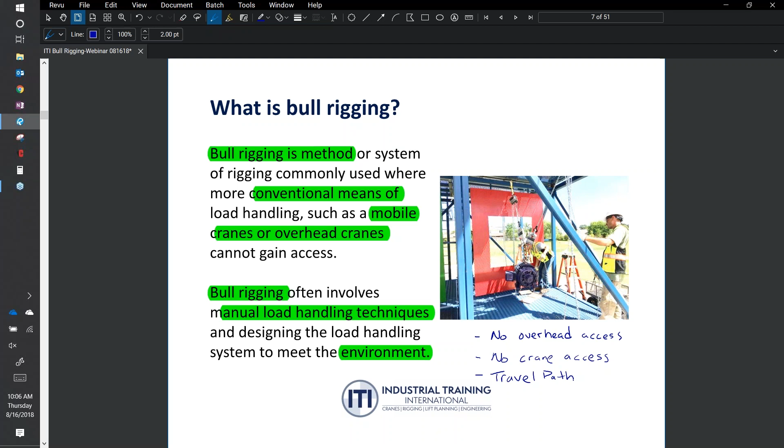Some common equipment we see in bull rigging: on the next slide we talk about the different types of slings we use. We've got a couple pictured that are most common, and we could probably add synthetic rope in some situations. The first one here, we've got wire rope, we've got alloy chain slings. All the regulations listed in ASME B30.9 still apply to this.

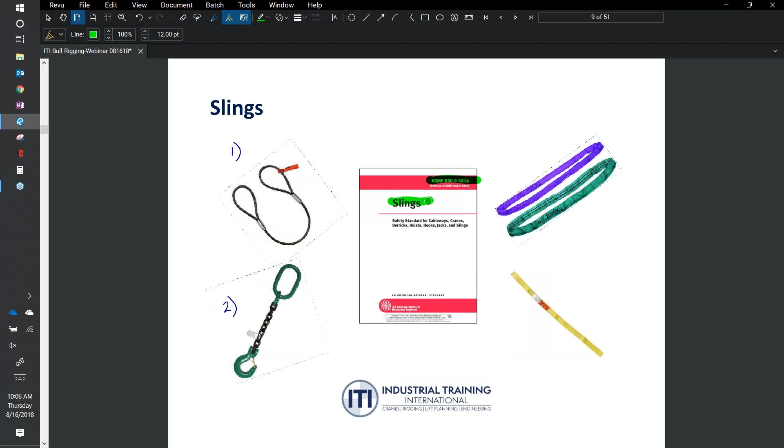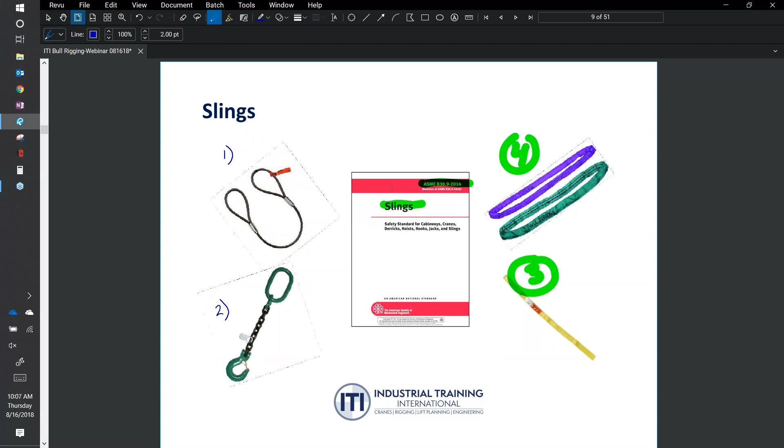So we still have to use them properly, according to the applicable federal regulations, whether general industry or construction, and also the applicable ASME standards. We've got wire rope, alloy chain, synthetic web up here, and synthetic web down below, my apologies, and then polyester round slings or synthetic round slings up above with number 4. So we've got our different types of slings, and like I said, we could probably add synthetic rope slings to those. Probably out of the 6 types of slings spoken to in ASME B30.9, metal mesh would probably be the least likely to be used in a bull rigging environment.

Next, we've got our hardware. So with the hardware available to us, we've got master links over here - I'll put a number 1 next to master links, oblong, pear-shaped, round. We've got shackles that we use, whether they be screw pin or bolt and nut style shackles. We've got our shouldered eye bolts. If you remember, for lifting, shouldered eye bolts are better than non-shouldered eye bolts because we can load them angularly.

But if we want to move away from eye bolts altogether, whether shouldered or non-shouldered, swivel hoist rings give us, if applied properly, torque to the appropriate value if required by the manufacturer, and then full contact of the bushing to the body of the load. We get a swivel hoist ring that gives you 100% of its capacity as long as you have free rotation of the bushing 360 degrees, and the bail 180 degrees.

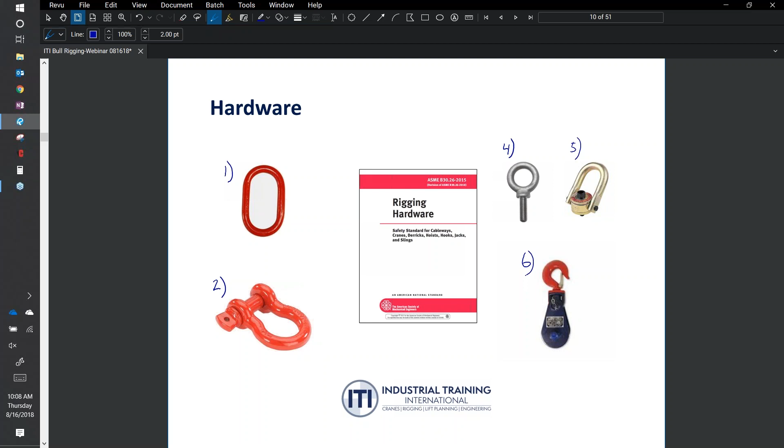And then finally, we have our rigging blocks down below. These can be used to increase line pull, multi-part line systems. They could be used to help redirect force if we're using winches and tuggers and things of that nature to help move the load. Next, we have probably what most people think of when we talk about bull rigging: come-alongs and chain hoists.

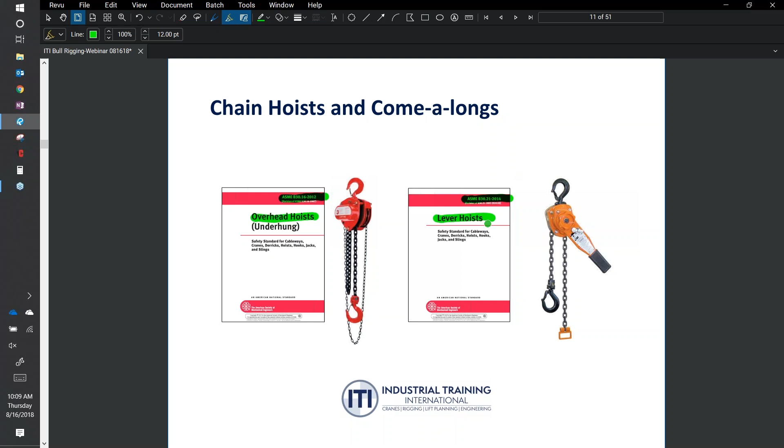Thing to keep in mind here is they both fall under 2 different ASME standards. ASME B30.16 is for underhung hoist, which would be manually powered, air powered, or electric. And then we have lever hoist under ASME B30.21, which would be what most of us think of as our come-alongs. You're not going to find any information in the federal regulations regarding chain hoist and come-alongs in either 1910-184 or 1926-251. The vast majority of our information on the use, inspection, and application of overhead hoists or lever hoist is going to be found in ASME or manufacturer literature provided by the manufacturer.

We also have winches, which is ASME B30.7, probably the closest thing we're going to get to using a powered lifting source is going to be a winch. This, in conjunction with rigging blocks, helps move the load for us.

We've got to pay attention - not all hoists are created equal. Some do not allow for vertical lifting or overhead lifting; they're specifically meant for horizontal load movements, while others are designed for overhead lifting. Just pay attention when you're making your purchase which one you're buying.

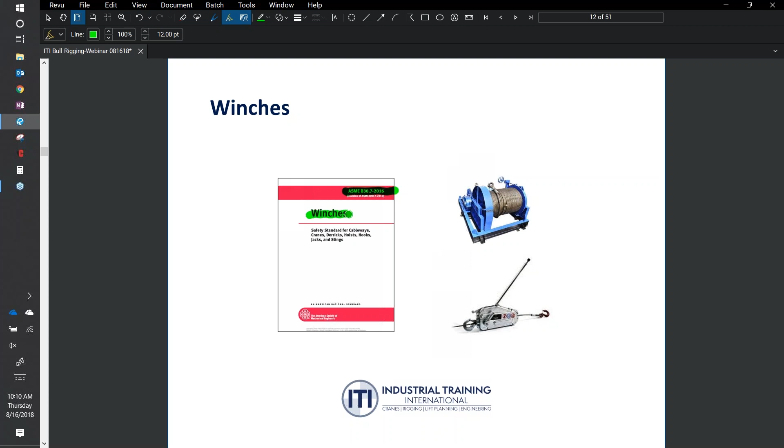And then at the bottom here, we also have what they call a grip hoist, also often referred to as Tirfor, one of the leading manufacturers. But that's another means and method of applying power to the system other than manual. With this one, you do have to operate the lever on the chain or on the grip hoist body to actually move the load.

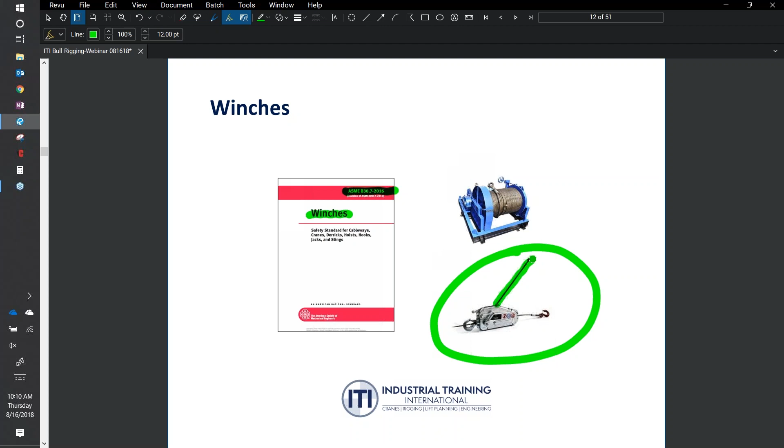Another method for bull rigging, and some people don't really think about it this way, but we're still in a manual load movement activity, are jacks and industrial skates.

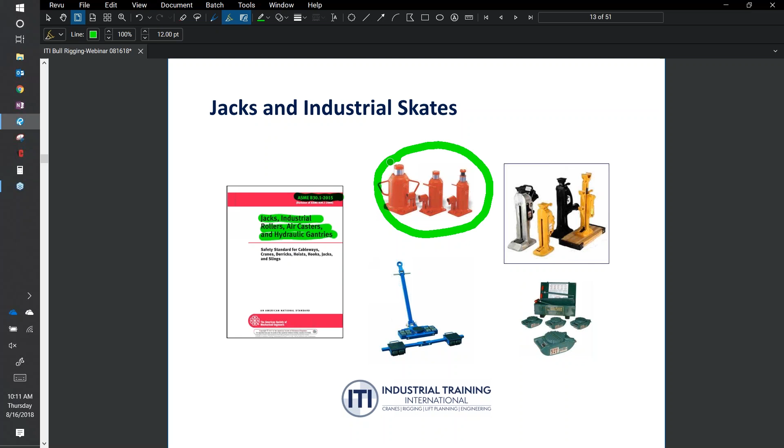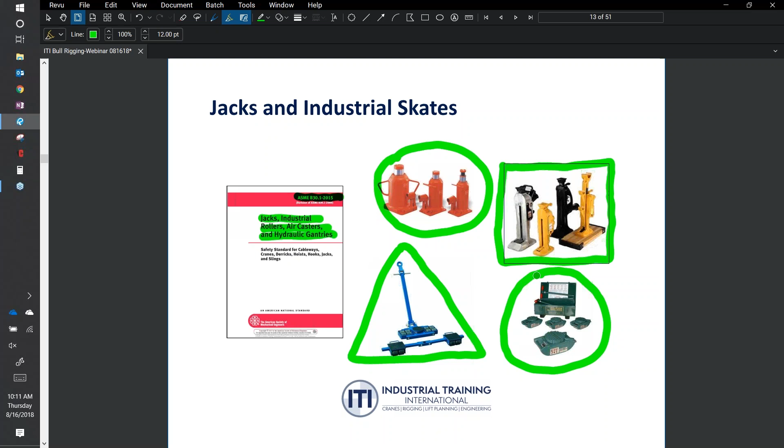We also have beam clamps on our next slide, different types of beam clamps. The important thing with beam clamps is they fall under ASME B30.20, which is below-the-hook lifting devices. Not all beam clamps are created equal. We'll find that out later in the program, where some of these are meant for just vertical lifting only. Others will give you a little bit of room, maybe 15 degrees from vertical in either direction, while others will give you 360 degrees. So you've got to pay attention to the limitations of the beam clamp you select and what your operation is going to be.

As we go through this, one of the key points we're going to hit on numerous times is the importance of planning the load handling activity. Even though it's manual bull rigging, planning is important: staging the equipment, having the right equipment, and knowing how to use it.

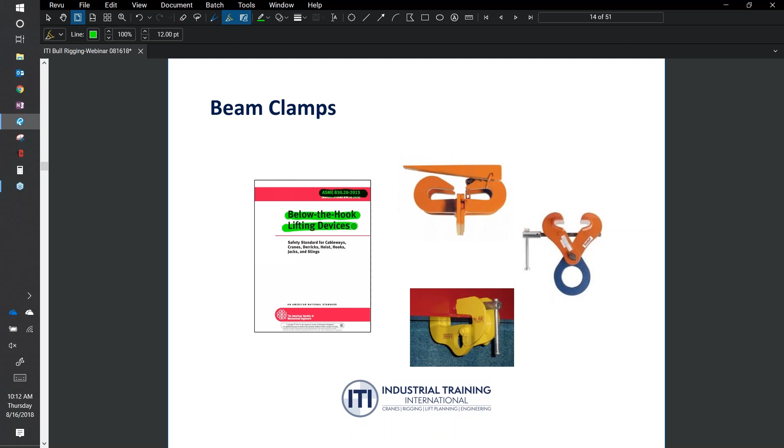So what are some bull rigging applications that we have? Well, the first one we're going to talk about is jacking and rolling: simply jacking a load onto industrial skates and moving it through a facility. Some things we're going to have to be concerned about. Let's talk about the resources available to us first.

So some resources we may have when doing jacking and rolling, of which we've already talked about: number one would be ASME B30.1, which covers jacks, industrial rollers, air casters, and hydraulic gantry systems. So if this is your method of bull rigging, great resource for you. Sometimes we get the load up on industrial rollers and move it using winches, so we'll have to rely on ASME B30.7 for the appropriate use of winches. We still have to connect the load to the winches, and things of that nature. Some other resources that may come into play are B30.9 for slings and B30.26 for our rigging hardware. So those are some of the resources.

Some of the equipment we might use for the jacking and rolling operation: one, we're going to have blocking and cribbing. We've got some great resources here at ITI - we actually have a horizontal rigging reference card that talks about the attributes of different types of blocking and cribbing, how to stack it. I have some slides built in here to show you panels of that card, and they even talk about the shear forces and what the different types of blocking and cribbing can support. So a great resource.

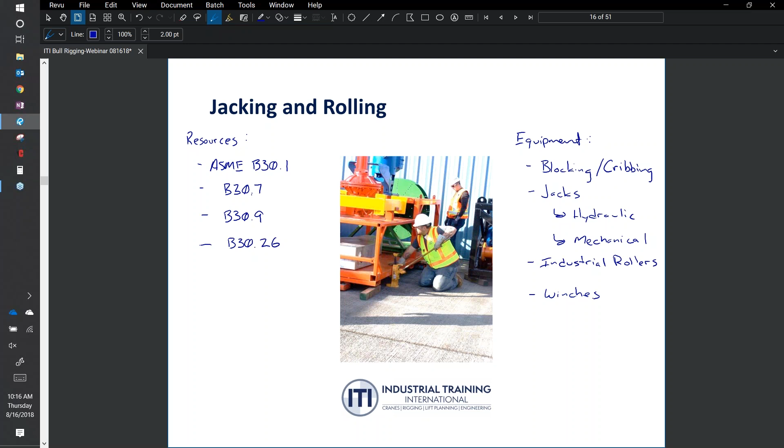And then finally, we've already talked about possibly using winches as part of this process. So that's some of the equipment we may see in a jacking and rolling operation.

But we have to talk about what considerations we have when we do jacking and rolling. I apologize, I can't write and type at the same time, or write and speak at the same time - I start writing what I'm saying instead of what I mean to write.

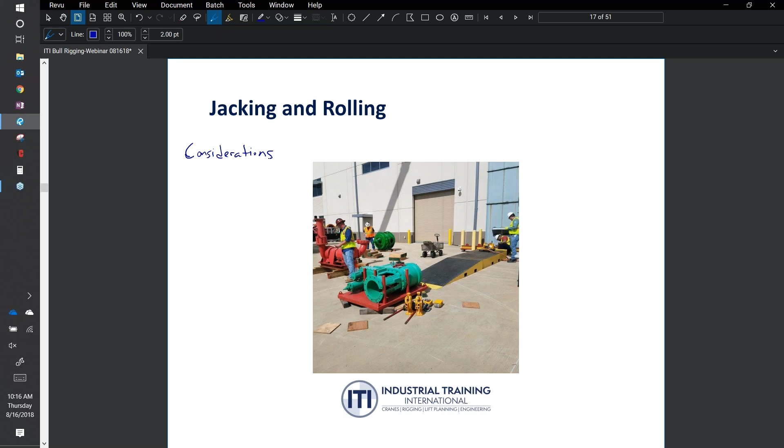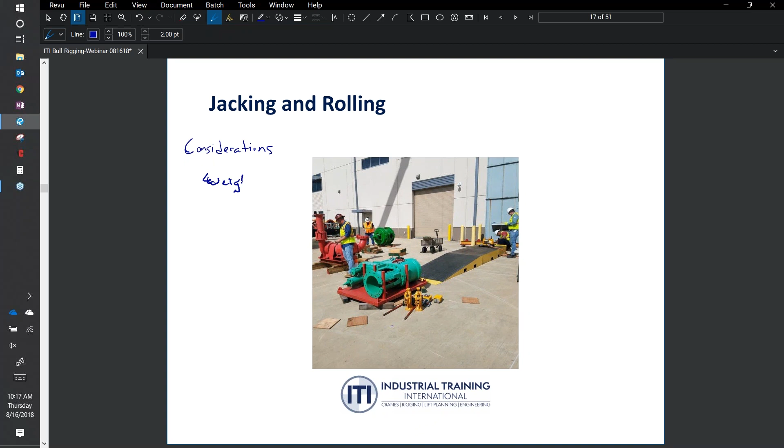So some of the considerations we have with jacking and rolling: we got to consider the weight of the load. Once we do that, we've also got to consider the share of load to each of the supporting industrial rollers we're putting it on. So, the same tenets of rigging - what's it weigh, where is the center of gravity - that helps us determine the share of load.

Because these skates, just like slings and shackles and other types of rigging hardware, also have capacities, we have to ensure we don't exceed the capacity of our industrial skates and rollers. So knowing the share of load based upon the distance the industrial rollers are from the center of gravity is very important for us.

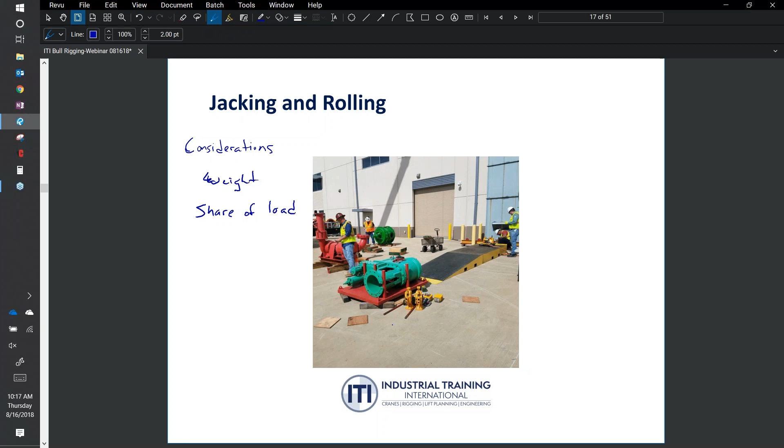We got to make sure the area is prepped properly. You can imagine maybe you have a winch in the system, you've got the load up on industrial rollers, you're moving it along, everything's going perfect - but because we didn't put a push broom on the surface we were moving the load across, now there's a rock, a pebble, maybe a nut, something laying on the floor that gets hung up under the rollers, and now everything comes to a grinding halt, and it overloads the winch and could possibly overload the rigging.

So we got to make sure the area is prepped. That is key to using these, particularly if you use air casters. Any kind of cracks in the surface, usually we tape those up with duct tape or the aluminum tape used for ducts and HVAC systems, to seal that floor up so the air casters can get the appropriate pressure and lift and move the load.

We got to consider inclines and declines, because if we're going up a hill or up an incline, more force is going to be required to move the load. If we're going down a decline, we got to have enough back force to basically hold the load back so it doesn't run away on us.

And all of this also comes into play with what we call the coefficient of friction. A load on wheels, typically a very generalized number we like to use is 5%, or 0.05 times the weight of the load, to give us the effective weight we're moving. But that changes based upon systems like air casters - I think most of them tout a coefficient of friction of like 0.002, so you're at 0.2%. So you can take a relatively heavy load, put it on air casters, and push it with your finger.

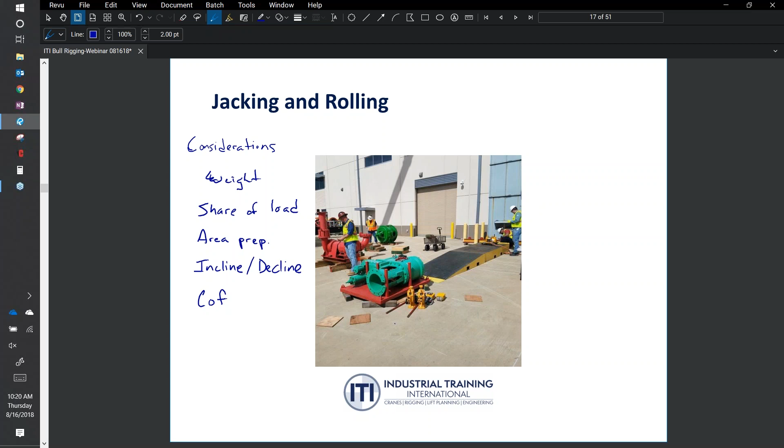Other considerations when we talk about jacking and rolling, and I've already mentioned this, we've got to consider the capacity of our equipment. Is it going to be able to support the share of load that we're expecting?

A big one, communication. We got to be able to communicate. We talked about this up front, that this is manual load moving, which means people are going to be right there in close proximity to the load, the travel path, the rigging. So we definitely have to be able to communicate. We don't want to get a load moving too quick for us to handle and somebody's in the travel path or at a pinch point.

So communicating, planning is so key to what we're about to do. And with that communication, we can add in, we got to consider personnel placement. And we've got to consider the plan.

What is our plan? If we don't have a plan, what do we really have? I just read a signature line on somebody's email, and it was like, without planning, all we have is a wish. I think it's a good statement. So planning is key to this.

And once again, all of our people are in close proximity to this. So we want to have absolute control of the situation. We want it planned out. We want it communicated. Everybody should know what's going on.

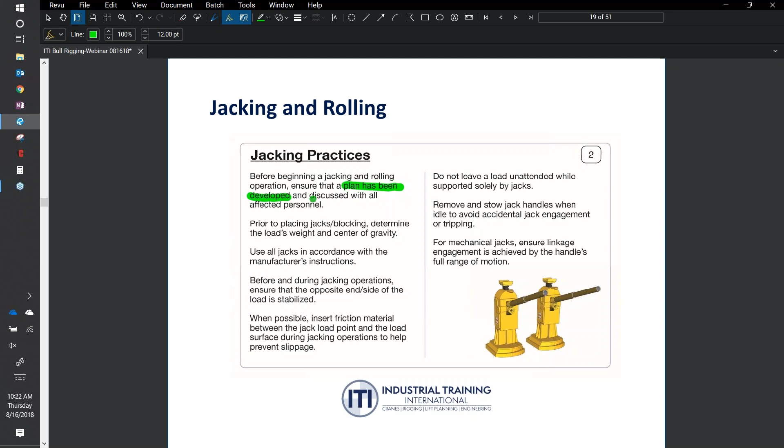On the next slide here, these are just some of the panels off of that horizontal rigging reference card that I mentioned, and some of the things that we talk about in there, kind of just reiterating some of the considerations I've already mentioned. Like the very first bullet point here speaks to the fact that, has a plan been developed and discussed with all the affected personnel? So planned and discussed, that's your communication and your planning component right there.

We've got to understand the importance of the load's weight and its center of gravity, which drives the share of load to each industrial roller. We got to make sure we heed all the manufacturer's instructions, prohibitions, recommendations on use.

Before doing any jacking operations, we got to ensure that the opposite end or side of the load is stabilized. We don't want to start coming up with the load and then the other side gives, or the blocking rolls. If our cribbing pile is too high, it could possibly roll the load.

We should probably have some sort of friction material between the jack load point and the load surface. Metal on metal has a lower coefficient of friction than metal on wood. So inserting wood blocking, we use plywood shims. Sometimes you can get little pieces of rubber that increase that coefficient of friction, so you don't have that slippage.

That we're concerned with. Another thing about communicating, and this could be handled during a pre-job brief, is we don't ever want to leave the load unattended while supported by the jacks. That's a live load. We think about unattended loads and suspended loads when we're talking about the use of cranes, but it also applies even here in bull rigging activities.

If the load is being supported by our rigging equipment, it is a suspended load technically, and we have to ensure that it's safed off and that it's landed. There's no, almost think about lockout, tagout, stored energy. That load up on those jacks, there's a lot of potential energy there, and if it shifts, it could come down.

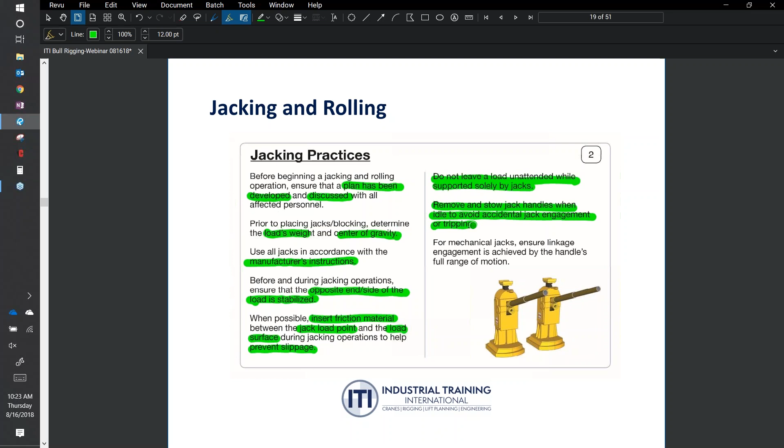To help prevent any accidental jack engagement or disengagement, we always recommend that you remove the jack handles from the jacks, whether they be mechanical or hydraulic. People could trip over them. They could accidentally bump the levers and engage the jack or disengage the jack. So just removing them prevents that. And that's spoken to in ASME B30.1 as a practice, if you will, a best practice.

Mechanical jacks, we want to ensure that the linkage engagement is achieved by the handle's full range of motion, so no partial movements. Everybody should be using one of those full clicks, and that's one of the advantages of those types of jacks.

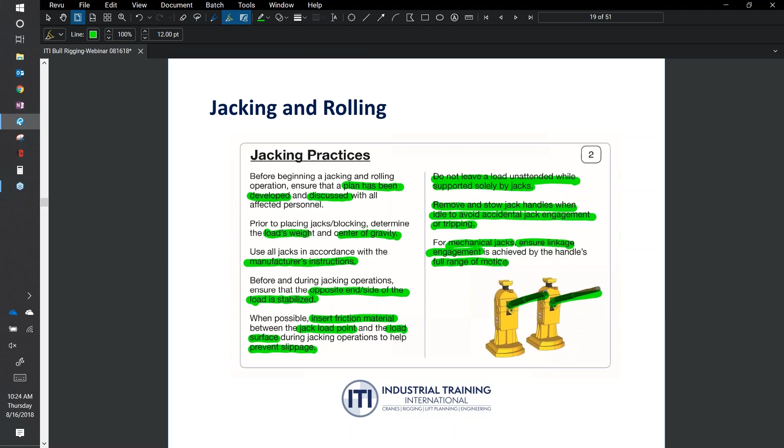Next, we'll talk about jacking from a cribbing pile, as illustrated here. This is panel 7 of our horizontal rigging reference card, but we got to make sure that a column of cribbing material is aligned below the jack.

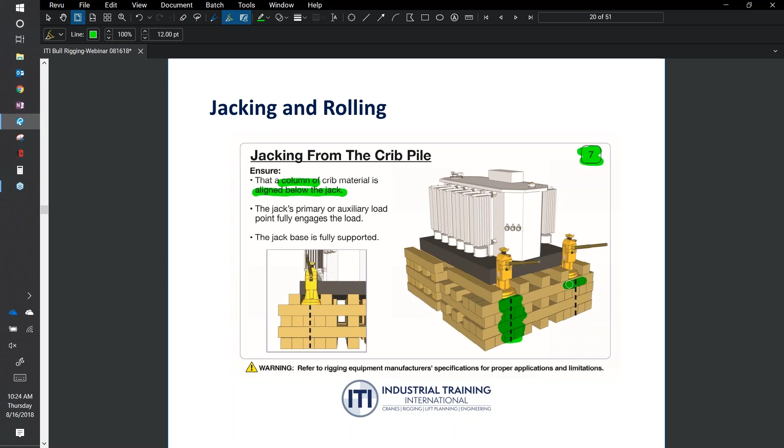That thing has to be fully supported throughout. You can see there's no voids, no air, if you will. It's fully supported from the base of the jack to the ground. We have to make sure that the jack's primary or auxiliary load points are fully engaged.

One of the ways we do that is using some sort of material between the jack connection point and the bottom of the load, increasing the coefficient of friction so it reduces the chance of slippage. But also we want to make sure the jack is fully engaged with the load at a point where the load can support that weight, because now it's going to become concentrated on it.

And as stated earlier, we got to make sure that the jack base is fully supported. We don't want the opportunity for this thing to teeter left, right, forward, backward. We want a nice, stable base.

At the bottom of the card, we offer a reference which we should all heed with any rigging equipment we use, whether it's bull rigging or conventional rigging: refer to the rigging equipment manufacturer's specs for proper applications and limitations. That should be part of any planning process and any use of any type of rigging. Know what the manufacturer's limitations are and how they want you to use their material.

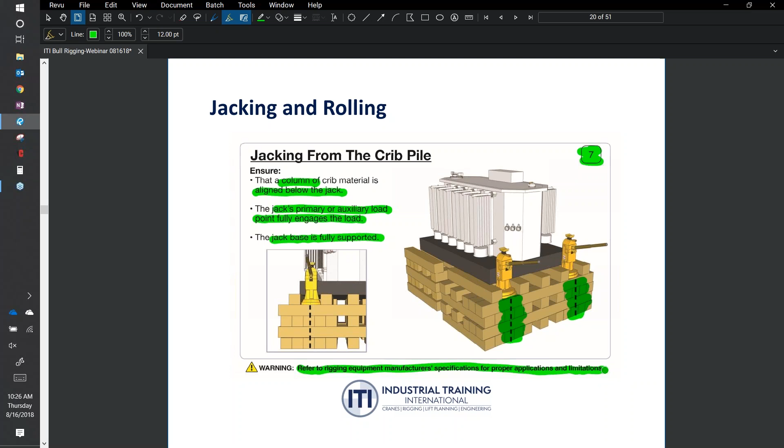Another topic, continuing with jacking and rolling, some other things with rolling practices. So we've raised the load up, we've got it on jacks, we're placing our industrial rollers underneath. We've got to consider the share of load to the points. Make sure we have an appropriate calculated share of load, that we're accurate, and that it's not exceeding the capacity of those rollers.

Just think about this: you're moving a piece through an industrial setting on a shop floor, but on that floor there's a drain and the concrete slopes to it for drainage purposes. If you have a 4-point roller system and you're moving through there, when you hit that indentation, the skate closest to it has the possibility of departing from the load and taking that exit ramp to that low point.

That wouldn't happen with a 3-point system, because it's just like a tripod you would set survey equipment up on in the field - it's more stable. So we actually recommend, when possible, using the 3-point roller system versus a 4-point because of that.

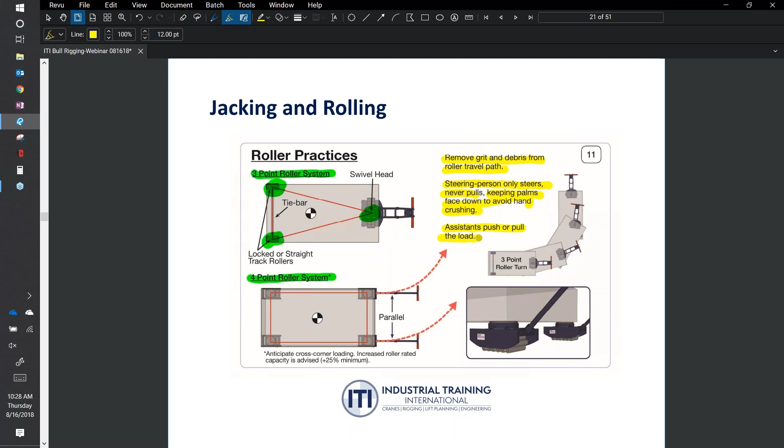And then we got to make sure we have enough people to push or pull the load, once again considering inclines, declines, and things of that nature.

Moving on to another type of bull rigging activity involves winching. When we get into winching, we'll talk about resources available to us. Well, one key one is B30.7, which speaks particularly to the winch system.

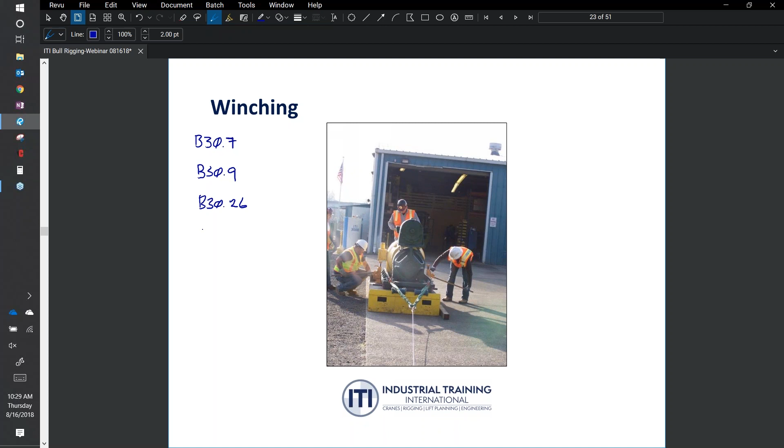So we got the B30.7, and then we've got the other cast of characters: B30.9 for our slings, B30.26 for our rigging hardware to connect the load to the slings. And then we could also have B30.1, where we're putting the load up on industrial rollers and using jacks and things of that nature.

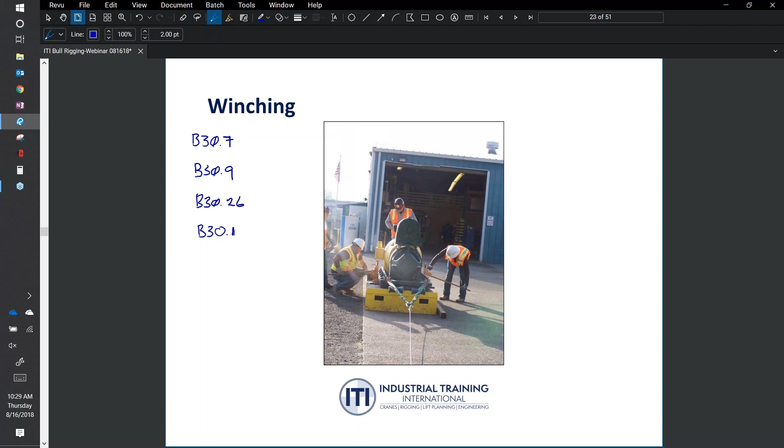So those are some of the resources, some of the considerations we have when we're doing jacking or winching activities. We've got to consider line pull. How strong is the winch we're using? Did we calculate it properly?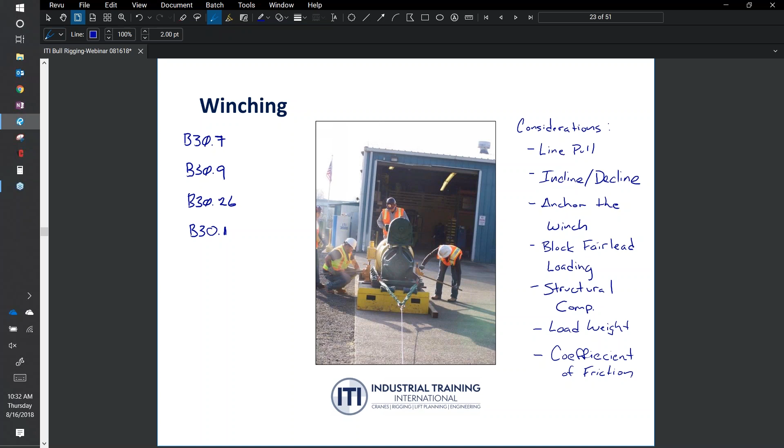On the next panel here we have winching. This is also off our horizontal rigging reference card. We spoke to those coefficients of friction. These are averages, but they definitely play in. A load on air, I mentioned air casters, 0.002. A load on rollers, or a load on wheels, 0.05. Once again, averages, you're going to get more specific information once you talk to the manufacturer of whatever you're looking at. Different formulas here for moving a load on a level surface, uphill or downhill. So a lot of good information just on this panel for jacking and rolling.

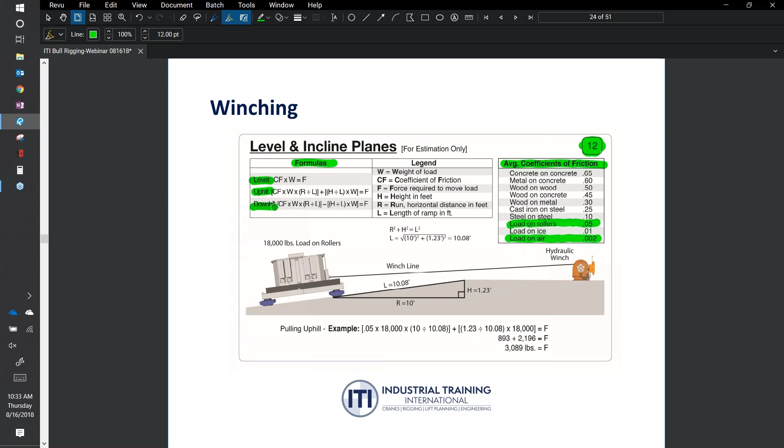The next topic or method of bull rigging is going to be drifting. This is what most of us think about when we hear the phrase bull rigging - chain hoists and come-alongs moving a load. You'll hear people refer to it as Tarzaning the load through a facility. We have our own bull rigging course, and we also do a little bit of bull rigging in our master rigger course. Students really enjoy that, and it's amazing - they can spend most of an hour planning that load movement and then less than 5 minutes executing it. So if you do proper planning, good things happen, and the execution goes without incident.

So some of the resources we're going to look at when we talk about drifting are going to be B30.9 for the slings, B30.26 for the hardware, and B30.7. We could actually use a winch system in a drifting activity to power the load movement. It is possible.

Remember, make sure you have the right winch though. Is it able to do vertical overhead lifting, or is it just for horizontal lifting?

The big ones we got to think about are ASME B30.16, which is our underhung hoists, whether manual or powered, and B30.21, which is our manually operated lever hoists. So those are some of the resources you can go back to for information on the use of that equipment.

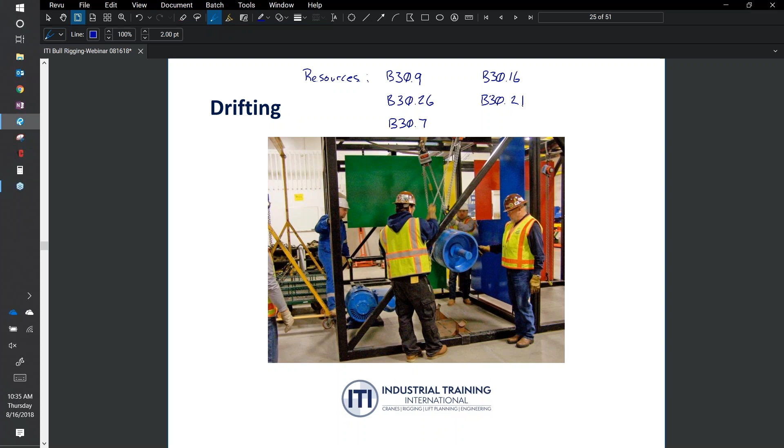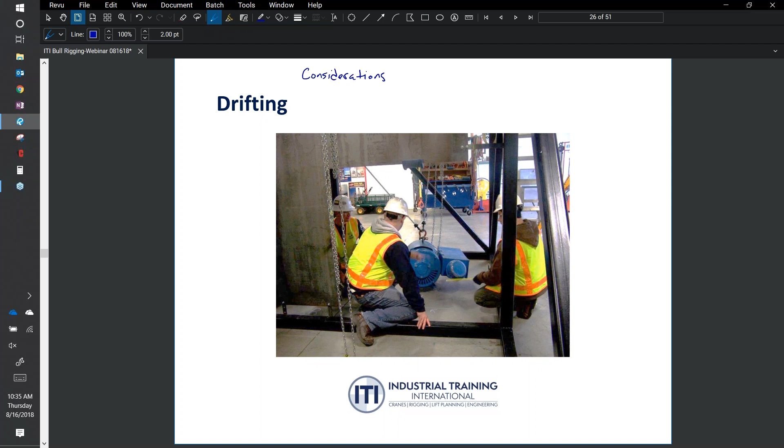Next, some of the considerations we have when we're drifting. We've got to consider the tension. We don't want to select the hardware based upon just share of load or the load weight, because angles are going to be involved in this.

We definitely have to consider the amount of tension that we're applying to the system. We've also got to consider the structural capacity. We're going to be attaching these chain hoists or come-alongs to the structure itself. Do we have a rated load point for doing this? We can't just assume that it's good enough or it looks nice, or think it'll be good. Unfortunately, I've seen people try to attach chain hoist to process piping.

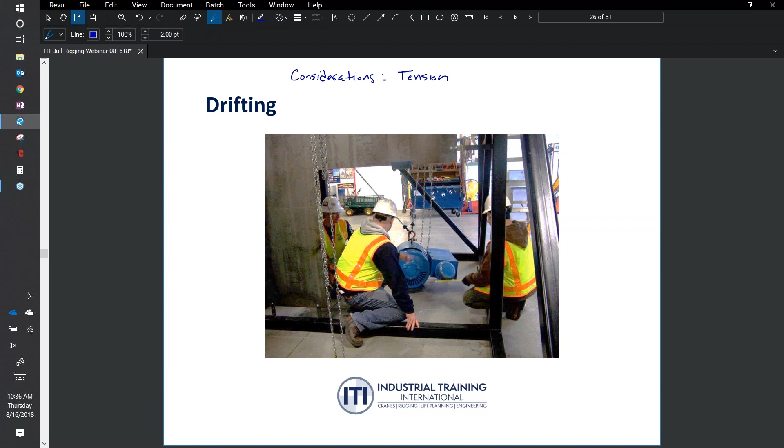Not a good idea. We've got to identify preferably an engineered lifting point. We have to know the capacity of what that thing will withstand. We may have to get engineering involved. If it's a facility where during every outage you're going to be in that area doing lifting, just do the analysis and put the capacity of it right there above at that lifting lug so we know what it is.

With that, we've also got to figure out the share of load, and we need to know the load weight. It all starts with that. Remember, the tenets of rigging: what's it weigh, where's the center of gravity, and what's our rigging method?

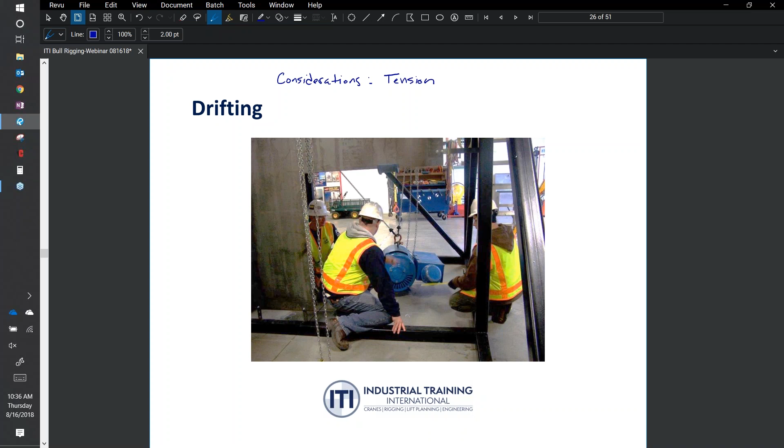And I apologize folks, my pen stopped on me here. As soon as it decides to write, I'll get back to that, but I'll just go through my notes here. So when we're talking about, and I'll repeat myself for those of you taking notes on the other side of the screen here.

So our considerations when drifting are: what's the tension, what's the structural capacity of our lifting point, like our engineered lifting lugs in the structure, what's our share of load, and what's our load weight. Just some of the considerations we have to think about.

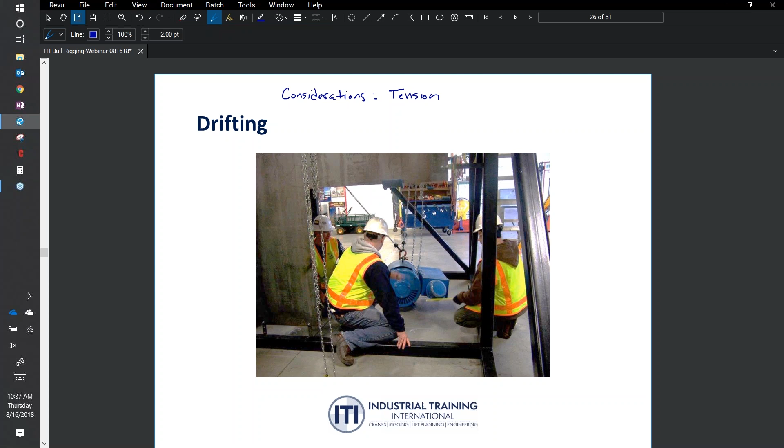Cautions about drifting: best practice is the tension in the primary chain hoist is reduced when the load is drifted with a secondary chain hoist. At some point, that second chain hoist begins to accept some of the load from the primary chain hoist. That's a good thing, but at the same time, each chain hoist has to be able to support the entire weight of the load, as pictured here.

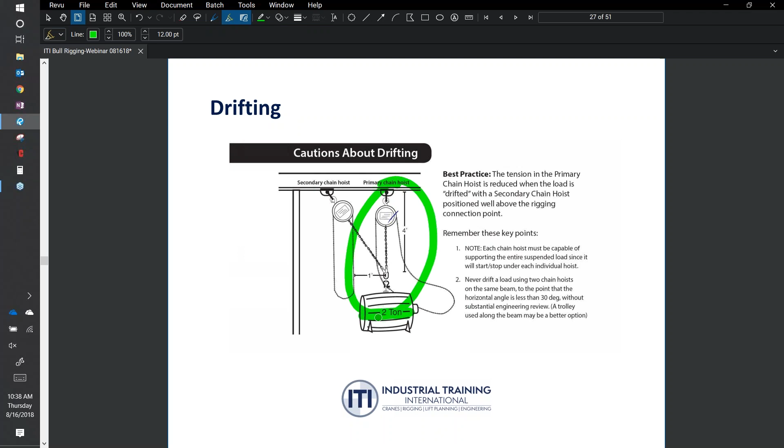That primary chain hoist is supporting the whole 2 tons of this load as it sits on the ground. The secondary chain hoist over here will eventually grab some of that as we move it along. But each chain hoist must be able to support the entire suspended load. And we never want to drift the load using 2 chain hoists on the same beam to the point that the horizontal angle is less than 30 degrees without a substantial engineering review.

We recommend that at this point you use a trolley beam where there's no angular loading and no additional tension. Everything's more or less just vertical, so you don't have the additional tension.

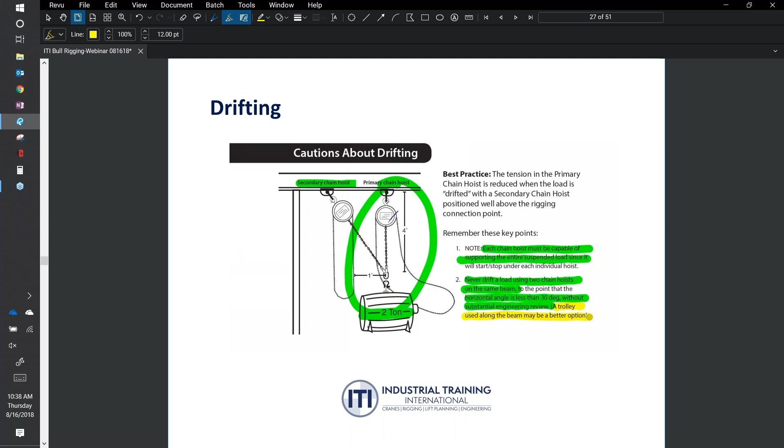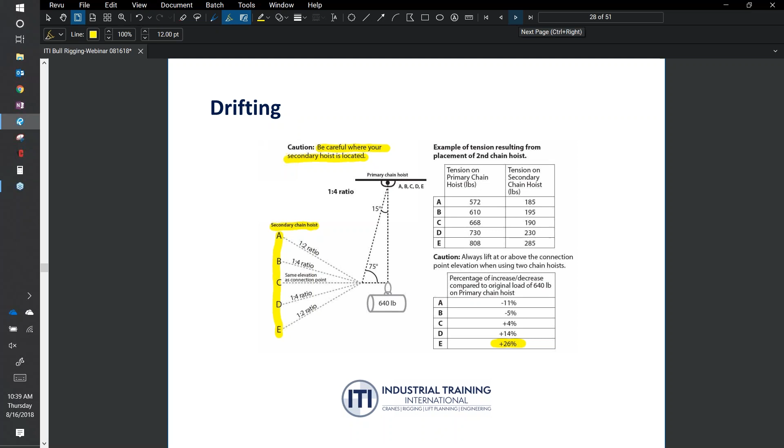If we don't have a welded in lug or something we can use, maybe we're working around a lot of I-beams, we can use drifting, we can use beam clamps for lifting. We get into these attachment points where you've got a 90-degree angle. Well, everything's just vertical, you're dealing with the weight of the load by itself, no additional tension.

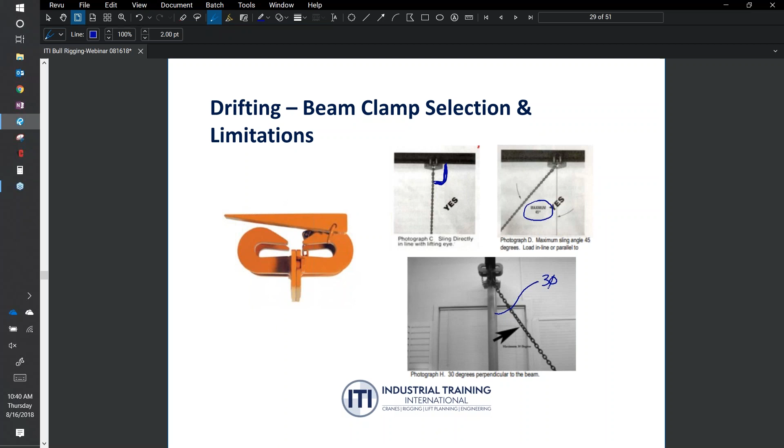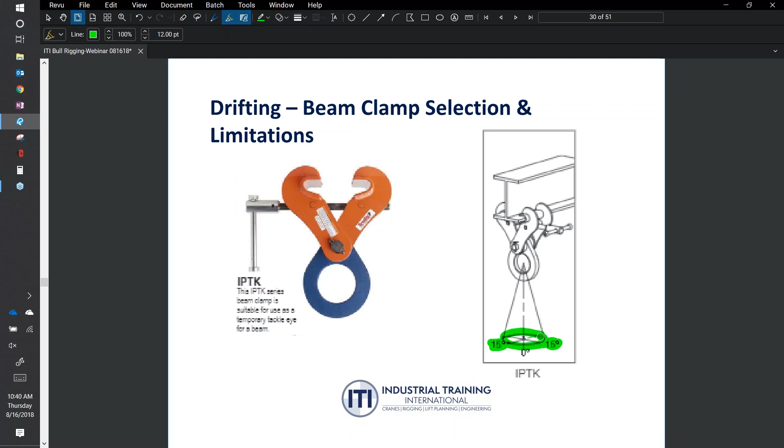What's the limitations that the beam clamps offer? On the next slide, we're going to see that this particular one is allowing the end user to go up to 15 degrees from vertical, pretty much in any 360 degrees around that connection point, but only 15 degrees. So when you're selecting your beam clamps, be aware of what their limitations are.

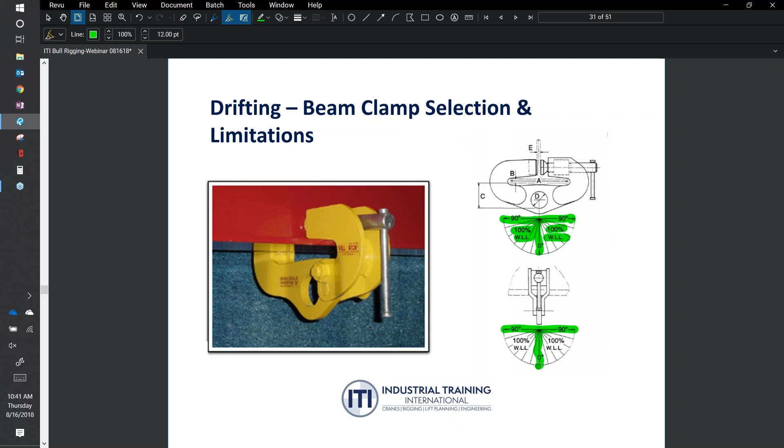I've seen in the past where people have tried to jack up a car to change a flat tire, and the shoulder of the road is sloped, it's soft ground, it's mud, and the jack just isn't supported by the surface and they can't get the car jacked up. Something as simple as that. We got to make sure the ground or the floor is stable and able to support the cribbing and the load weight. These cribbing stacks could possibly have a substantial amount of weight in and of themselves. That may be part of your calculation when determining floor load.

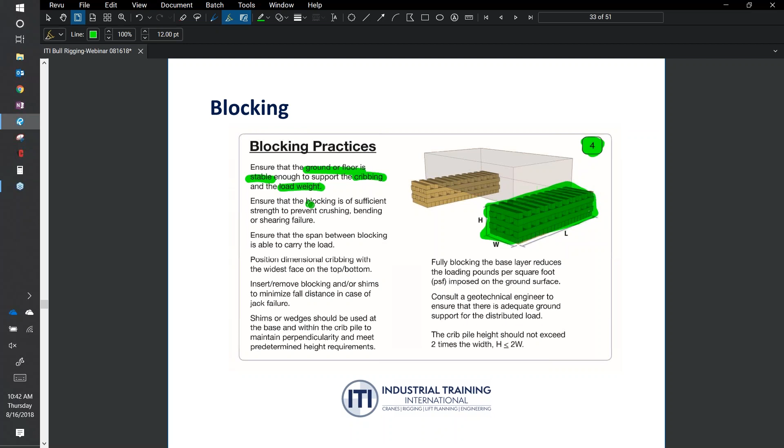We got to make sure that the blocking is of sufficient strength to prevent crushing, bending, or shear failure. There's actually a panel in the horizontal rigging reference card that gives you a generalized view of what those values are for different types of wood blocking. Considering the span between the blocking is able to carry the load.

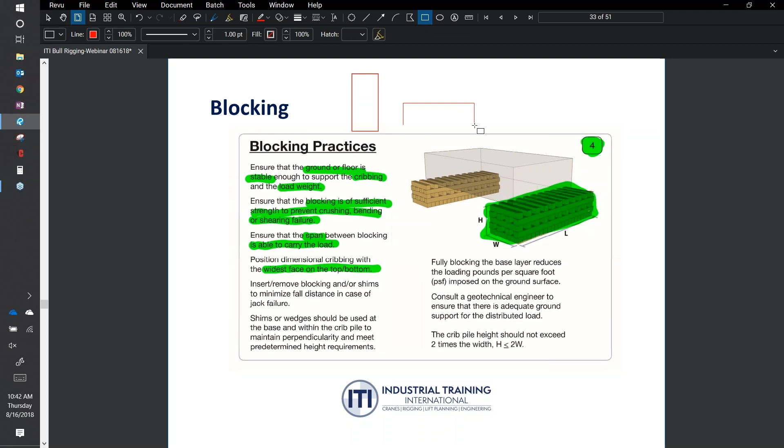We recommend that when we build our cribbing, that the widest face is on the bottom. Best way to illustrate it is, if I can draw a box here, we don't want to put it like this. We would rather that box be placed like this, the second one here on the ground, widest face down. So I'll just label these A and B.

I love technology. When it's working, it's fantastic. But we definitely would be looking more at the B, the wide face sitting on the block of wood.

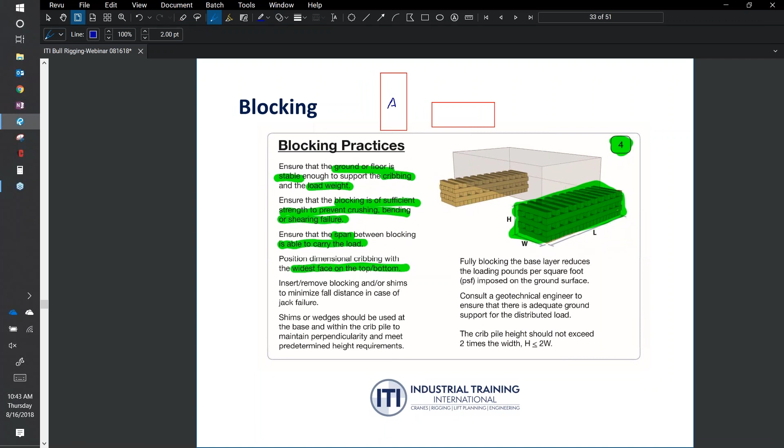I'll just jump in for a second. I know there are a lot of people on the line. Thank you for joining us. You'll notice a lot of these principles are familiar from other types of rigging applications when we're using a crane or other load handling equipment, but specific to bull rigging, that's a difference. Joe mentioned a lot of these are touched on in different courses, master rigger, intermediate rigging that we have, but the bull rigging course specifically focuses on these areas. So I think Joe's back up and running here, so I'll turn it back to him.

Appreciate y'all's patience. So going back to our blocking conversation, inserting or removing blocking or shims to minimize the fall distance in case of jack failure. We want to keep the blocking as close to the bottom of the load as possible, to minimize that distance if something were to happen. Shims and wedges can be used at the base or within the cribbing pile also to maintain perpendicularity and meet the predetermined height requirements.

You can only jack a load up so far on a cribbing pile. I think it's 4% of the distance between your supporting points, and that's all spelled out in ASME B30.1 for us also.

We recommend full blocking on the base layers to reduce the loading pounds per square foot imposed on the surface. As you can see in our illustration, the very first layer is 100% blocked. We don't have any gaps, no air gaps, and that's to decrease the amount of bearing pressure on the ground surface or floor surface.

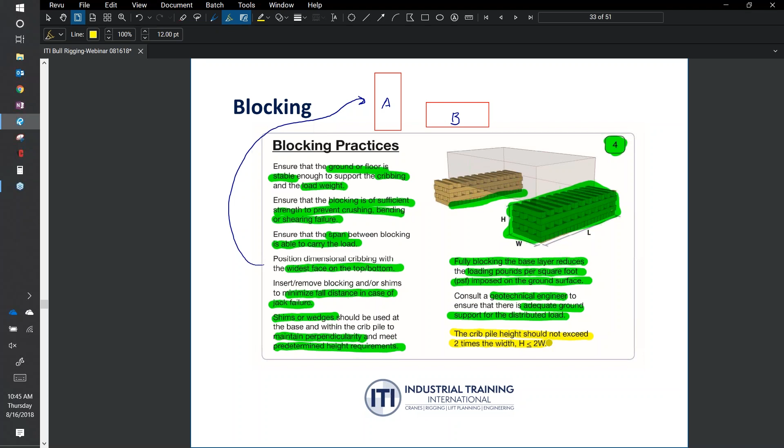On the next slide, we talk about share of load, and some things here about determining the share of load. It's not that you simply divide this by 3. Share of load is going to be dependent upon the distance that the cribbing or blocking piles or crib piles are from the center of gravity of the load.

Just some simple things to point out, like here we've got a 3x2 base. Well, that 3x2 base ultimately, we've got about 83%. We're producing about 1,250 pounds PSF in this example.

Now on point B, I'll change colors so it's easier to follow along. On point B, our cribbing stack is narrower. It's not 3x2, it's 2x2. So we've got a smaller footprint, and it's going to produce more ground bearing pressure - it's going to produce 1,875.

Now those two, A and B, are supporting the load together on that side of the center of gravity, working independently or together on that side. But on the opposite side, we have point C, which is a 4x4 base, and we can see it's supporting that entire end. It has to be able to, it's seeing 938 PSF, but what's helping it is it's a 4 foot by 4 foot footprint of cribbing that's distributing the load.

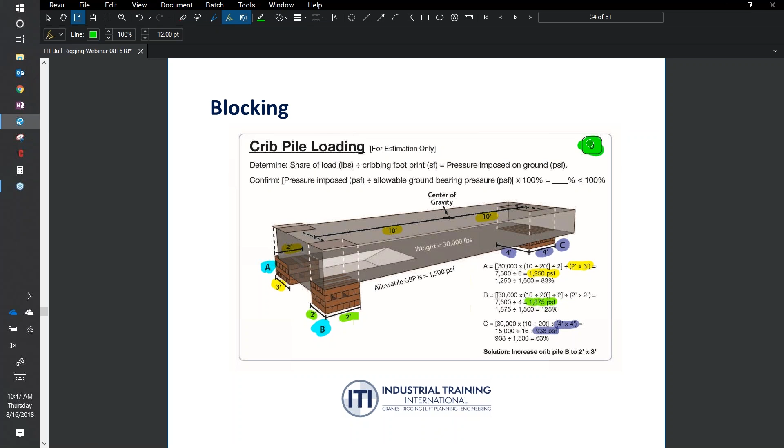So just used as an example here, but once again, another panel out of our horizontal rigging reference card. The card has been, I believe, 3 or 4 years in existence, but a great card if this is what you're doing. I know I keep going back to that, but it is a tremendous resource in the planning process.

So some other drifting concepts. We talked about the equipment, we talked about the resources available to us to determine how to use the equipment properly. So far we've talked about the different types of applications: jacking and rolling, winching, drifting. Now let's talk about some of the concepts present when we do bull rigging.

The first thing is line pull. How much line pull do we need, or does our winch give us? Line pull is going to be based upon those parts of line that are supporting the load. In this case, as I have in the blue circle here, all of those parts of line come across, and it looks like we've got 1, 2, 3, 4, 5 parts of line in this case to determine the essential line pull back here.

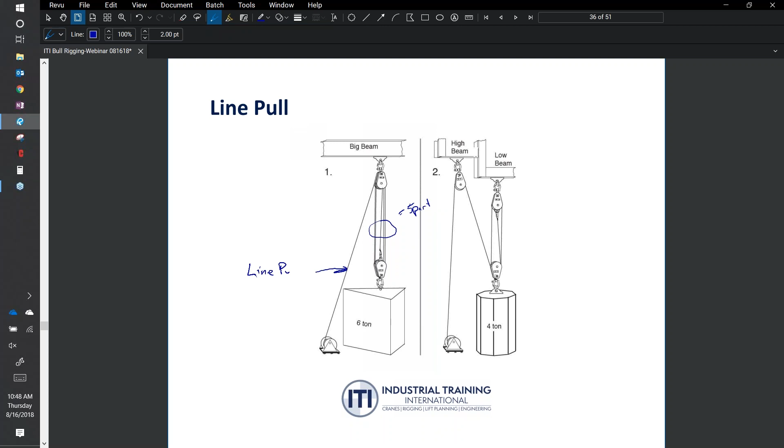Not only do we have to consider line pull, but we also have to consider the loading on the beam. So in these situations here, we've got to consider beam loading too.

On the other side, a little bit more of a complex situation, because the parts of line to determine line pull are going to be these 4 right here. But when we're considering the parts of line to determine the beam load, it's going to be based upon just these 3 parts. So we have to have a clear understanding of not just line pull, but also beam loading, and this is a great example of that.

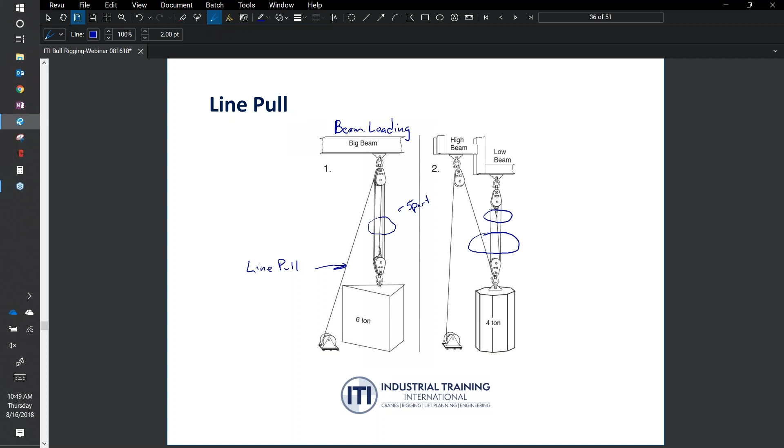The next slide, we talk about share of load and tension. Some of the considerations we get here is what's the share of load at each of these points?

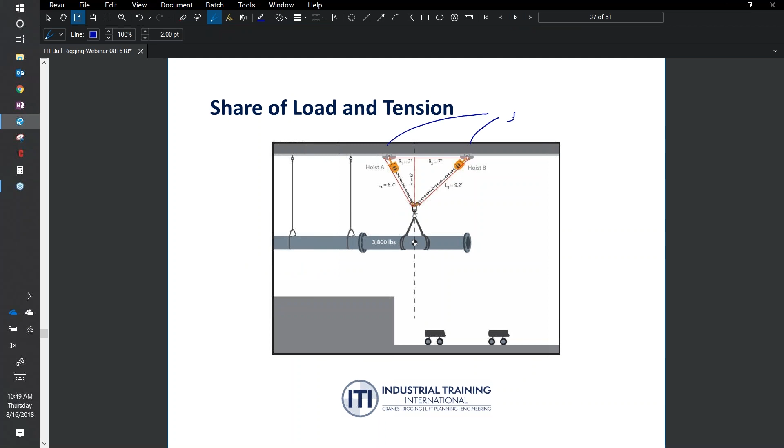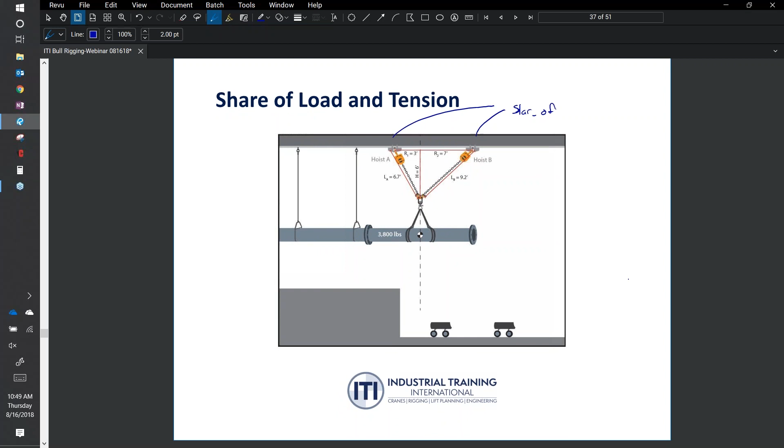What's the share of load at each of these points? With that, we also have to consider the tension that's present. How much tension is here due to these angles? So we've got to think about tension also.

With all of that into consideration, we've got to consider the beam loading up here that's taking place because of the share of load and the tension. And then finally, we've got to consider what's our equipment capacities, and I'll put that over here off to the side. So what's our equipment capacities too? Primarily based upon what's the tension that they're going to experience.

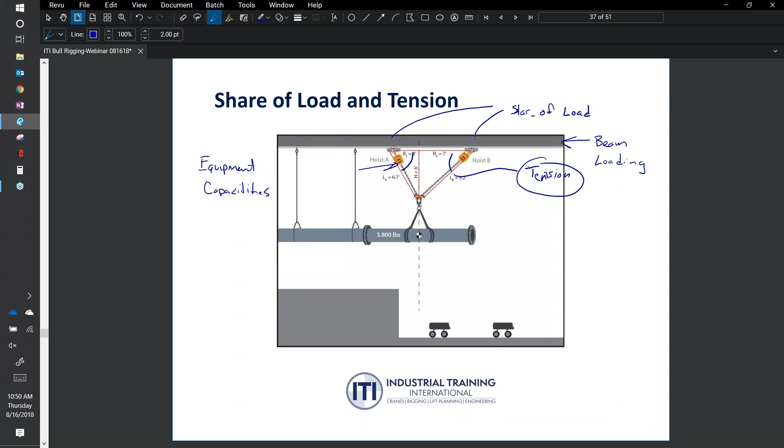When we get to the next slide, it's basically we're taking everything we just figured out, but now we've got to do them for each load transfer. So as this thing comes across, we've got to consider all of these in each scenario as we move it across. What's the share of load? What's the beam loading? What's the tension? And does our equipment have the appropriate capacity as the load would move right to left?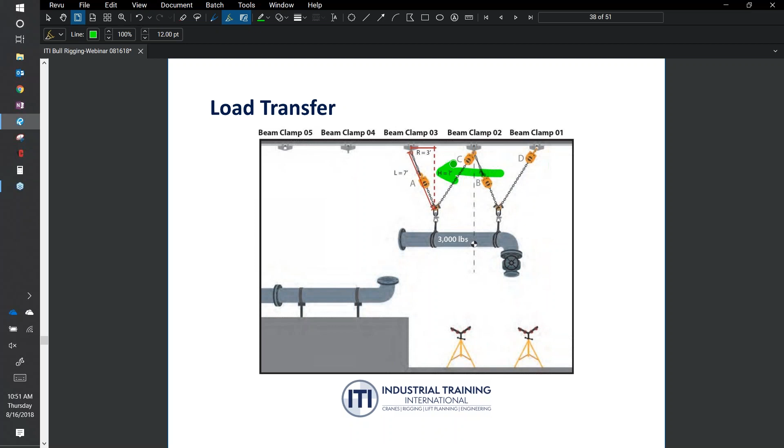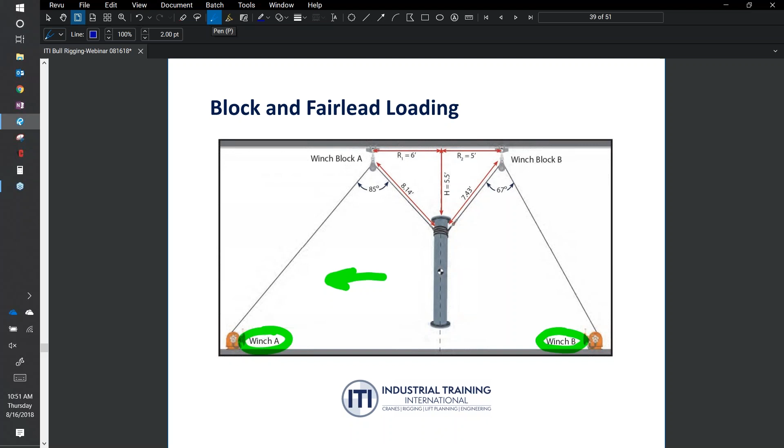I mentioned that we could use winches in a bull rigging situation. Here we've got the same considerations. They're using 2 winches. Obviously, if we're moving it in this direction, winch A would pull the load as winch B pays out. So going back to one of the very first things we talked about, good communication between the operators of both of those winches. You don't want them working opposite one another and pulling in opposite directions. So good communication, good coordination between those operators. But it is possible. But we still have to consider the beam loading.

We have to consider the tensions that are applied. We have to consider the block and fairlead loading due to the angles. Just put fairlead loading. And we've got to consider line pull, and how many parts of line do we need to be able to successfully pull this off based upon the equipment that we have?

So those are just some of the concepts that are at play with any of these bull rigging scenarios or applications, and they all have to be addressed, preferably in the planning phase. If we address everything in the planning phase, that's our practice time. You hear athletes talk about the mental preparation and mental reps that they get. That's what planning does for us. It gives us the mental reps. So when we go out and execute, we've already thought about the contingencies and everything that could happen, and we've planned for it. So planning is very much key in bull rigging.

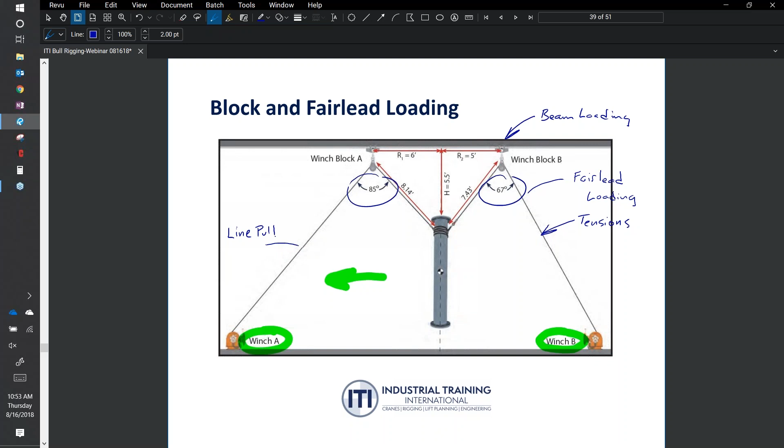So what are some things that we might see? This is more like hazard recognition, but some obvious stuff. I'm going to highlight here the areas that are concerning to us. Right up here, in the green shaded area, what they've done with that hook is they've gone through and hooked the hoist chain of the chain hoist back on itself.

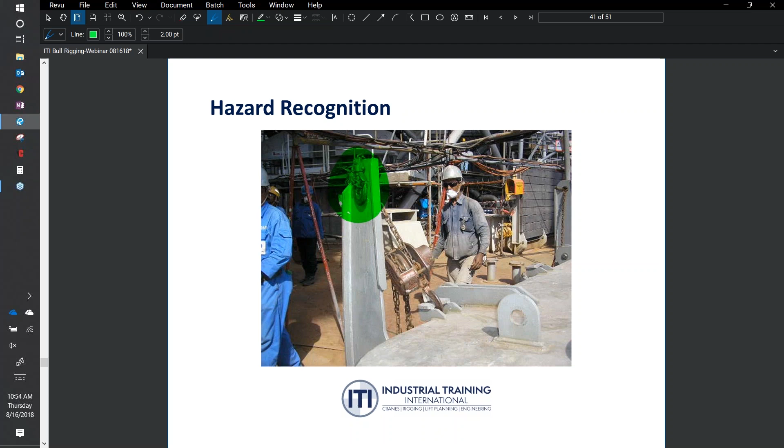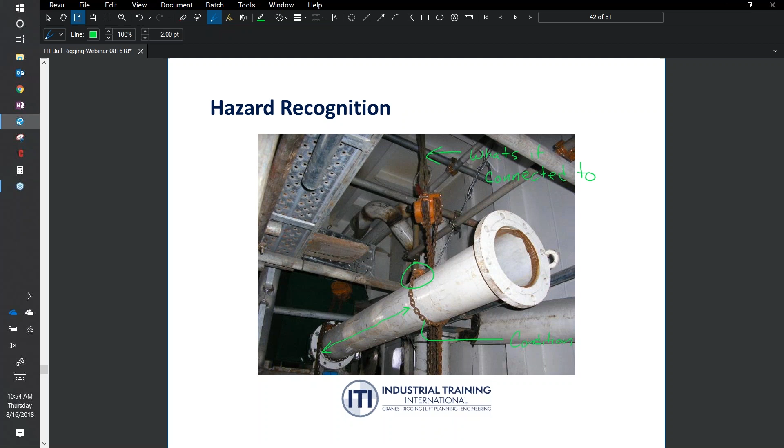That's prohibited by ASME B30.16 and ASME B30.21. And if you read the manufacturer's literature, they also prohibit the practice. On the next one, there's actually quite a few things to consider. My first question is, well, what's it connected to? Will it support the load? We've got to consider here that they've also choked back on the hoist chain itself. Looking at the chain condition, it looks a little bit rusty and not well taken care of. We've got to think about the share of load between the connection points on the pipe.

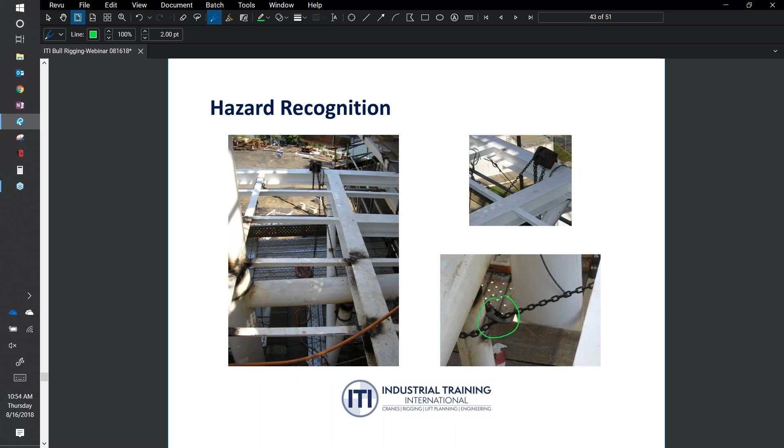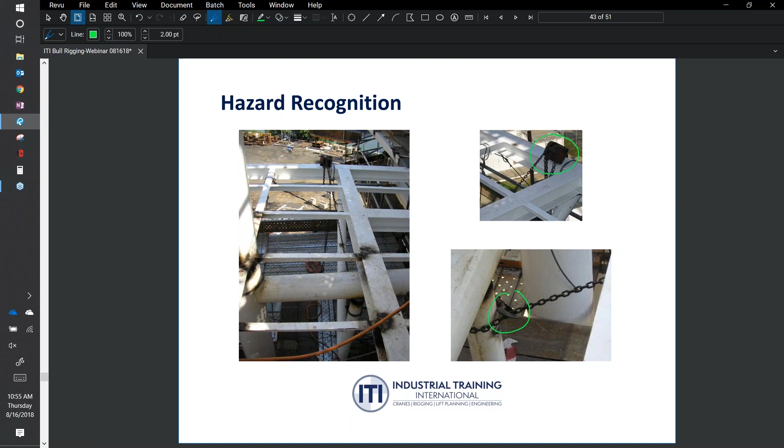So a number of things that we can consider just in that section. On the next slide, once again, choked back on itself right here. And then we may not have inline loading here. It looks like the housing of the chain hoist is actually bound up against the structure. That's not good. That goes against ASME B30.16 and 21, and also manufacturer recommendations.

Some other considerations that we should be looking for: sling protection. We're using, it looks like a synthetic web sling to secure the chain hoist to the structure. Do we have any proper sling protection as that thing goes around the I-beam? And then once again, in that orientation, the load is rigged, choked, the hoist chain is choked back on itself, which is a prohibited practice.

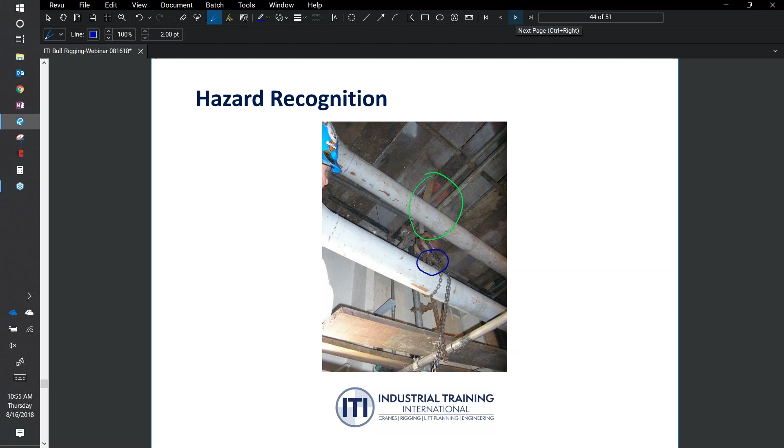Another photo coming up here. Look at how they're taking the hook. If you can see this, they're actually taking the hook and just tip loading it, just connecting it to the metal structure there. That's not acceptable.

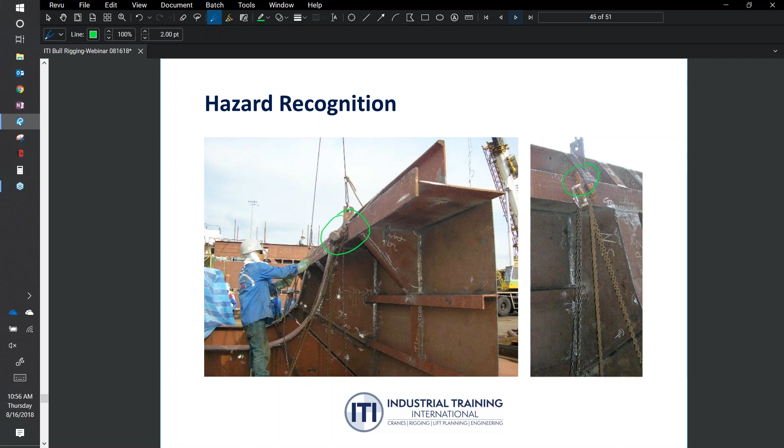So improper use of the hook right here, and then we also have it occurring on the back side. These are things we should be looking for when we get out. If our folks are doing this, I would highly recommend that we stop the operation, explain to them what we're doing and why we're doing it, and then move on.

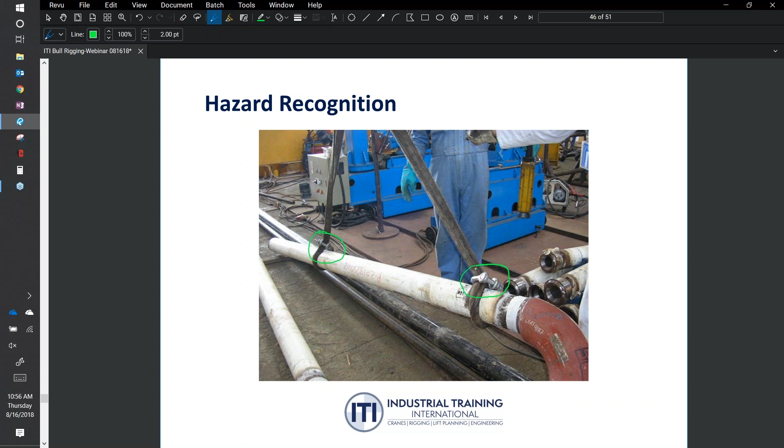So to avoid all of those poor practices, bottom line is good training and good practice leads to successful outcomes, and that's really what it's about.

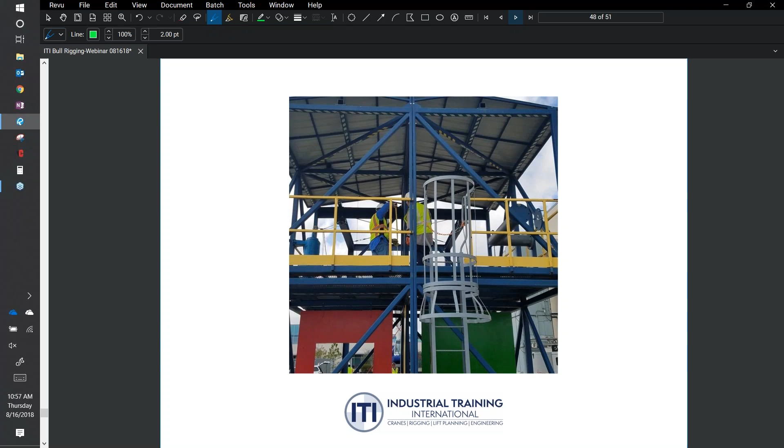We've got to put people in, we've got to play to our folks' strengths. We got to put them in positions to succeed, and we got to give them the knowledge to do the job right. Our workforce has attrition due to retirement, and we've got a lot of great folks coming into our industry. We got to take care of them, but we do have to train them properly so they can take care of business and provide for their families and help support and grow our industry. But it all starts with the investment in those people and providing them with the knowledge they need.

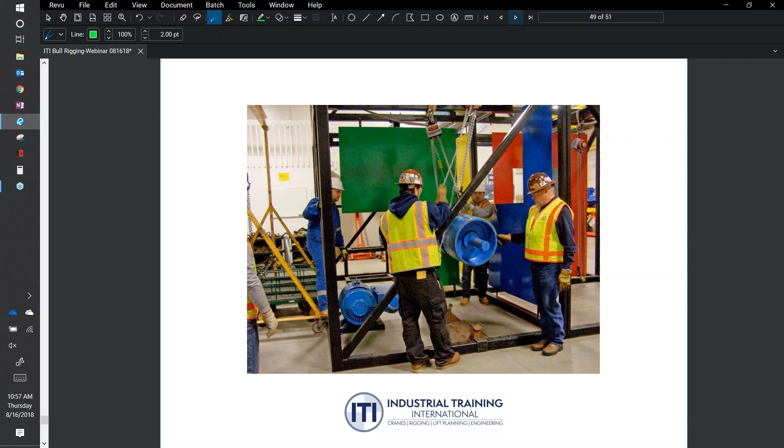The way we approach the training aspect, the first thing we look for is we want them to have an understanding of the theories and principles that are at play. We're not going to beat them up in the classroom with the information. We're going to give them what they need to know and understand it. We always tell folks, we want you to be in a defendable position. Whether you choose to do something or choose not to do something, you need to be able to defend that choice. And the only way you can do that is with knowledge and understanding of these theories and these principles.

But we go a step further than that. We also want to have them take those theories and principles that they learned in the classroom sessions and now go and apply it in a hands-on environment and do skills building activities. That's where, with the adult learner, the information really begins to make sense to them.

Classroom stuff is great, it lays the foundation. But when they get to apply those theories and principles and basically assess what they've learned and put it to use, that's what really seats the knowledge and really provides impactful training that sticks with the guys when they leave the training environment and go back to work in the field.

Through that process, we reinforce the safe and efficient practices. Training is, yes, it's about doing it safely, but from my time in safety, I've found that you can have a safe work environment successfully coexist with an efficient work environment.

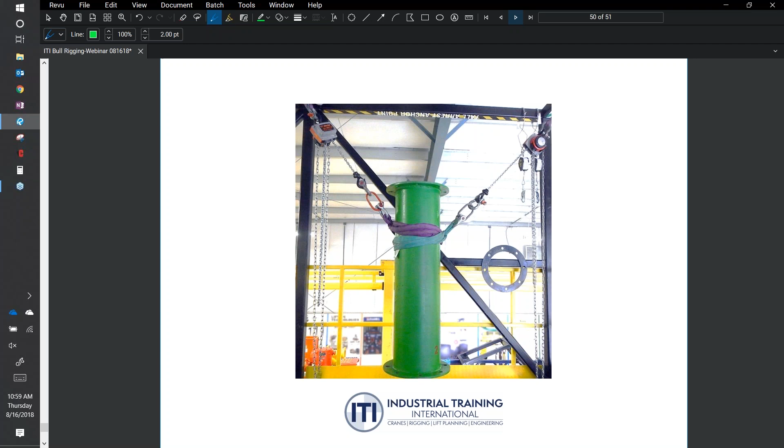Thanks, Joe. Awesome stuff as usual. We do have a couple questions. Like Joe said, thanks for your time, taking some time out of your day. We're all very busy, I know, but important stuff we're touching on and getting specific on some of these topics and really digging in.

It's only going to help everybody in the industry if you're connected, whether you're executing bull rigging tasks, or you oversee people who do, or if you didn't know anything about them, and you didn't know when and where to use it. So that was the ultimate goal of today's session.

But let me jump in here really quick, we got a couple good questions. So Chris asks, this came up when we started getting into the drifting section. He asked if there are any specific advantages in using a grip hoist winch versus a typical come along.

A grip hoist winch, you have the potential to stand off a little. The problem with come alongs is you are right there, you've got the lever on the lever hoist, or the come along, your operator is right there, very up close and personal with the rigging, all that tension. A grip hoist, yes, they still have to operate the lever, but they can stand off ever so slightly, and stay out, get out of the fray so to speak, and still provide the movement. As with anything, make sure that they're properly trained in the use of the grip hoist, what it can do, what it can't do. That's the important part. If it's something new to your organization, please take the time to do the appropriate training with them so they understand how to inspect it, how to use it, how to apply it.